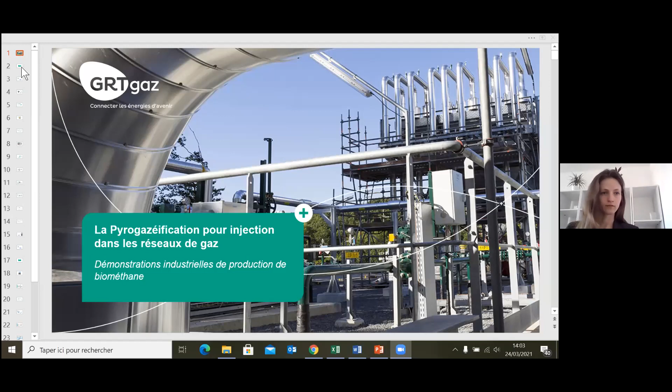So first of all, the context and the challenges of the pyrogasification sector for injection into gas networks. Good afternoon, Bertrand Simon.

Now, GRTgaz is a gas transporter, let's say, in France. We're in charge of moving gas across 80% of France. Our main role is to take the gas that arrives in a gaseous or liquid format through the terminals, and then afterwards we transport the gas to all of our major industrial clients or to the main centres

where the gas is consumed, in other words, the major towns and cities. We run a network, a gas transport network of about 33,000 kilometres.

So this means that we cover as many kilometres as the railways do in France, just to give you an idea of how big our network is. And we transport over 500 terawatt hours of gas per year, which is greater than the amount of electricity consumed in France each year.

So, as you can see, a great deal of energy travels through France, and three quarters are used up in France, and about 20% of the energy then goes into neighboring countries.

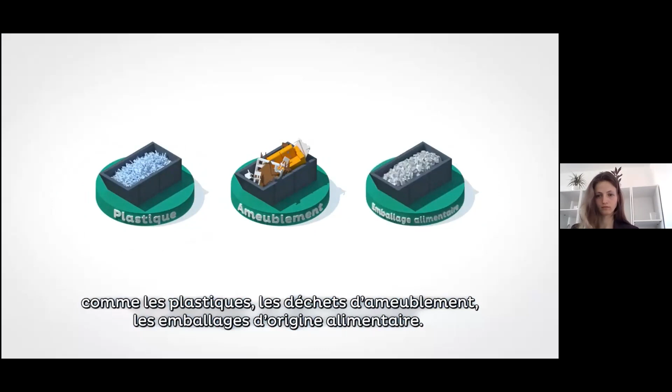Thanks to pyrogasification, for example, we at GRTgaz believe that it is possible to optimise this waste that is produced locally and that has been very rarely used thanks to the traditional approaches, whether it's of renewable origin or not, such as residue from farming, for example, from the wine sector or from industrial sectors, or whether it's of non-renewable origin, such as plastics, furnishing waste, or packaging for foodstuffs. Well, all of this waste can potentially be used to produce green gas.

Pyrogasification consists of basically heating materials that contain a great deal of carbon at a temperature between 850 and 1500 degrees centigrade. This operation aims mainly to decompose the raw material into different gaseous molecules. This mixture of molecules that we call syngas is mainly comprised of all different types of carbons. Methane is one of them, for example, and the molecules obtained are then recombined to produce a different type of gas. Once this gas is injected into the networks, it can be then used locally, and it can replace the natural gas that has up until now been provided.

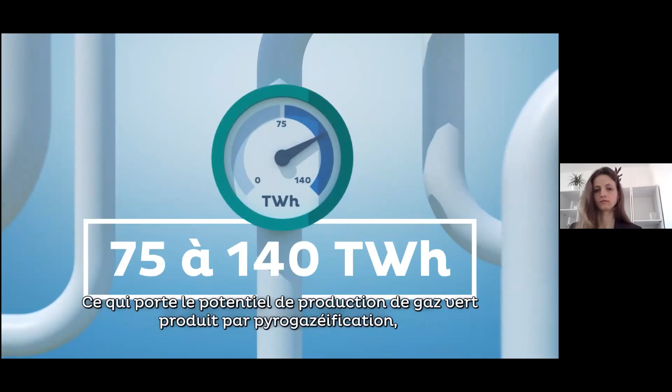Local areas can potentially reduce by 50% the amount of waste that is then sent to tips, and 100% of the plastic recovered should be able to be recycled. This means that, potentially speaking, green gas production using injectable pyrogasification solutions would mean we can move from 75 to 140 terawatt hours. This accounts for approximately 1/3 of the gas present in the networks.

By interconnecting the energies of the future, the transport network for GRTgaz will be the link between the resources available in the local areas that are as yet not used and the energies of tomorrow.

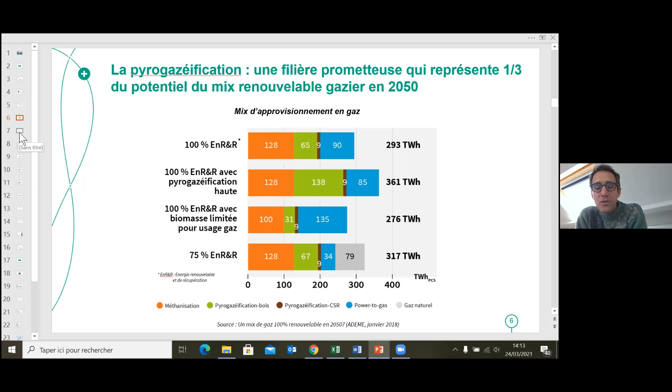A study that was also carried out back in 2018, one that was coordinated by the ADEME, demonstrates that in 2050, 1/3 of the gas that will be consumed in France will be produced thanks to pyrogasification. In other words, there's enough potential in our local territories for us to be able to guarantee that we can produce the gas that we need for our own consumption.

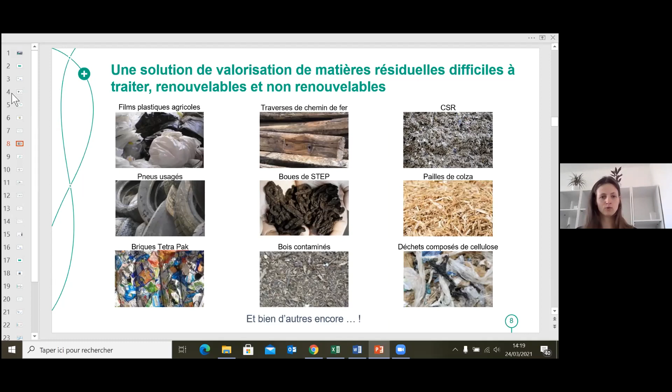So as we were saying, pyrogasification is first of all a solution for reusing residual matter that cannot be recycled or reused. We're talking about a broad range of resources. We've identified 22 main categories that can be renewable materials, but also other types of materials: forest waste, wood that's a little more polluted, for example wood polluted with solvents, but also non-renewable waste such as old tires, plastic waste, or solid recovered fuel. These are things rejected from sorting units or that come from household waste. These are the main categories that can be used in pyrogasification systems to produce gas that can be re-injected into the network.

But what we have to underline is that not only are we seeing new projects emerging, there are also projects achieving their objectives, producing gas for re-injection. For example, GoBiGas, which started injecting gas into the network in 2014. So there are different successful projects in Europe, and this means we have a solid base for commercial projects at European level, and in particular in France.

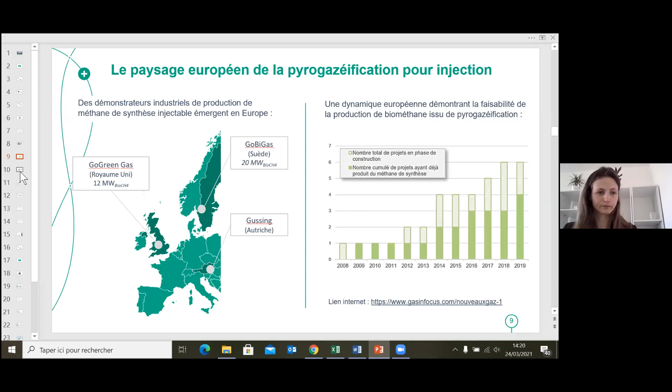Yes, so talking about France, there's a great movement in France. Lots of things emerging, about 10 or so projects.

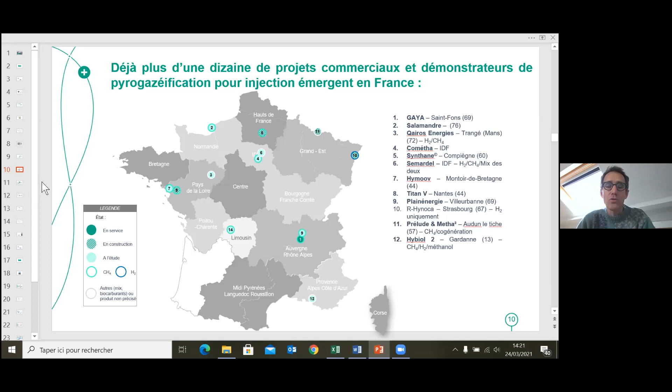Pyrogasification for injections. And to those, there are a number of private projects that need to be added, so we don't have the details of those on this map. All of these projects are part of a local circular economy. The aim is really to make the most of the local waste produced in the local area, and that's why most of them are supported by the local authorities, because they do provide a service. They treat the waste, but they also produce energy locally.

Now let's focus on, among the projects, 4 projects because GRTgaz is investing in these projects, it's supporting these projects. These are demonstrator projects, all 4 of them. The aim behind the projects is to produce methane using a pyrogasification value chain or a methanation chain to produce different types of gas.

So there's the ITIA project. It's a demonstrator, the Synthane. The idea is to use pyrolysis that's very well controlled by ITIA with a catalytic methanation process. There, the objective is to produce synthesized methane.

So there's also one in the west, in Nantes. The aim there is to couple a new kind of technology, a gasifier that is produced and controlled by Leroux et Lotz. And there's also a methanation unit, a biological methanation unit. This is innovative for Europe, and there will be a great future for this kind of process.

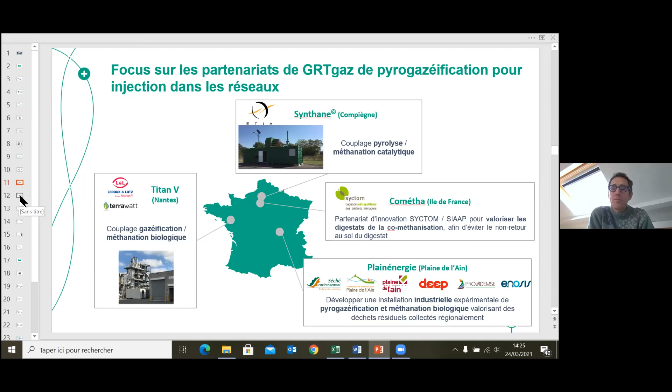La pyrogasification. So pyrogasification for injection, as we see, we've got demonstrator projects, we've got commercial projects across France. It's a sector that is structured and very much mobilized. So there are over 50 stakeholders within the injection pyrogasification working group that's been working now for 5 years.

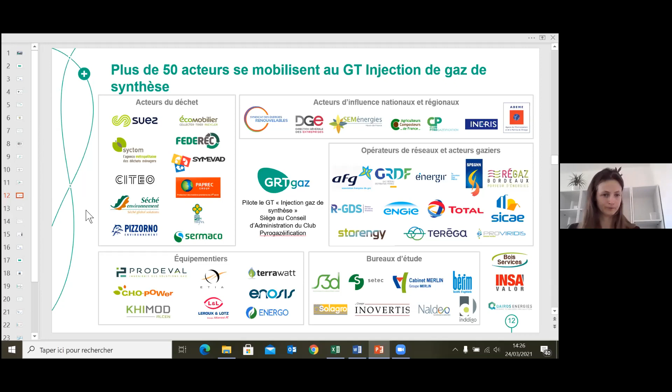The working group belongs to ATEE, so that's an organization working on energy and the environment. So it works with different stakeholders. Within the working group, there are all of the different value stream stakeholders based on pyrogasification, waste stakeholders, and network operators and gas stakeholders, as well as OEMs, French OEMs, design offices, but also key opinion leaders at regional and national level.

So this sector, as far as we see, has different assets, and that's why GRT Gas and the industry generally are interested in it. Well, first of all, what are the advantages? Well, it's the use of the waste that we've just seen. But what is noteworthy is that often it's waste that we don't know what to do with. So often it's waste that is usually buried in landfills. So pyrogasification allows us to stop burying this waste and transform it into a resource.

It also means that we can use a lot of different types of residual matter. So we mustn't get this wrong. Pyrogasification is not a penknife that can adapt to everything. It has to be sized according to the type of waste that it has to treat. But in the world of pyrogasification, there's a variety of technologies, and that means that we can work with different types of matter. So there are also economic challenges that can be taken into account.

So it's a sector that allows us to create units with local jobs, because the stakes are local, the challenges are local, and these jobs require different levels of qualification. And that's to be appreciated, given public policies in different regions. In France, we're talking about units that are really sized for the area in which they are installed. The idea is not to create huge plants, but to deal with the waste that is produced locally. So the idea is not to have these plants in the center of cities, but really to have them around the periphery.

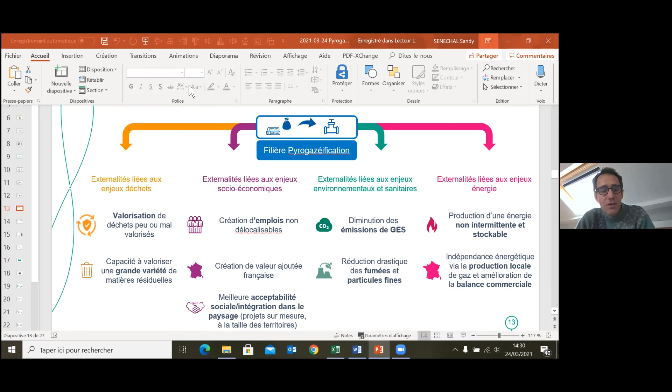So these are the different advantages that we see in pyrogasification for injection, and we believe that it's a sector that has a lovely future in France.

Okay, so some key figures. Pyrogasification for injection is promising. This sector in 2030 will represent 1 terawatt-hour of gas injected into the network. This corresponds to 500,000 tons of waste a year. And from an environmental point of view, we'll be able to reduce our CO2 emissions by 165,000 tons per year.

So it's ready to be industrialized. As of 2023, we will be able to industrialize this sector. There will be pyrogasification for injection plants ready. The projects will be sized according to the regions. The average power in France is between 2 and 30 megawatt CH4s. This corresponds, for those familiar with incoming tonnage, to 5,000 to 100,000 tons coming in a year. So this means that local reservoirs, local sources of waste will be optimized.

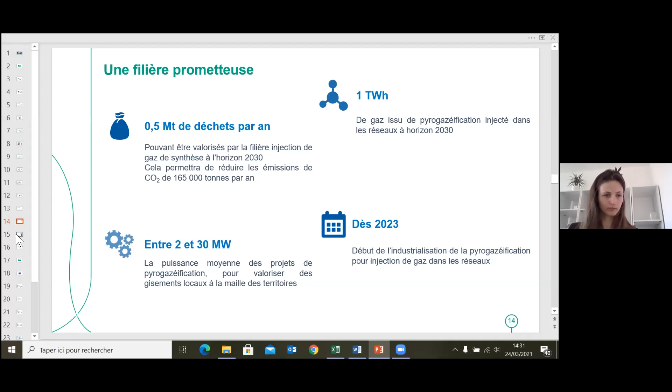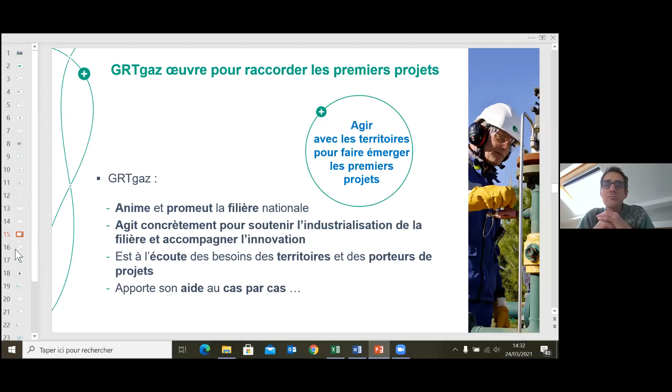So concretely, GRT Gaz, with this very strong conviction, is supporting the sector. It's feeding into national thinking, regional thinking, helping to federate stakeholders. We're also supporting local projects and providing help with innovation. Innovation, of course, is necessary to make this technology even more efficient. So we're really there to listen to what regions have to say, or what project leaders have to say, and to help this kind of system emerge even further.

So to conclude, in a few words, pyrogasification for injection into networks is a solution for really optimizing waste and producing gas locally that can then be injected into the networks. It's a dynamic sector in France. This can be seen by the deployment of different stakeholders in the sector, but also by the emergence of commercial projects and demonstrators across France. So I suggest now that we close this first part of the conference with some questions and answers.

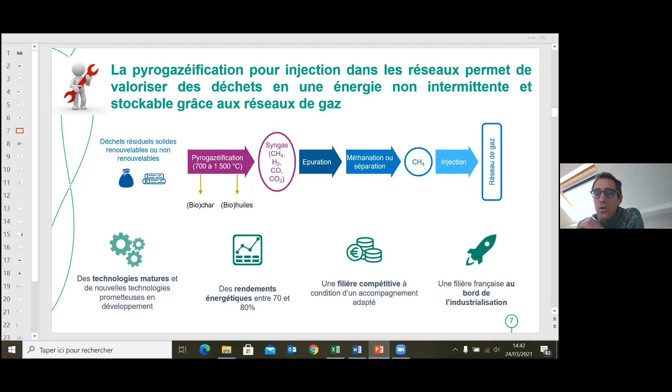Perhaps we should answer the remaining questions in writing.

Just perhaps one last question, which has come up again: it's about the different business models possible. It's true that there are two main business models that can be envisaged. Of course, these need to be worked on a case-by-case basis, and it really depends on the technology being used.

There's a business model that focuses on renewable waste, so biomethane that's produced. There's a framework in France, the energy climate law. This makes it possible to have experimental contracts set up with calls for projects, and the modalities for these projects are to be thought about with the local authorities, with the support of innovative sectors working in the pyrogasification field.

And there's another business model that focuses on non-renewable waste. There's a kind of fee that acts as a driver. Some companies did not know what to do with their waste, and so this was a means of making the most of it.

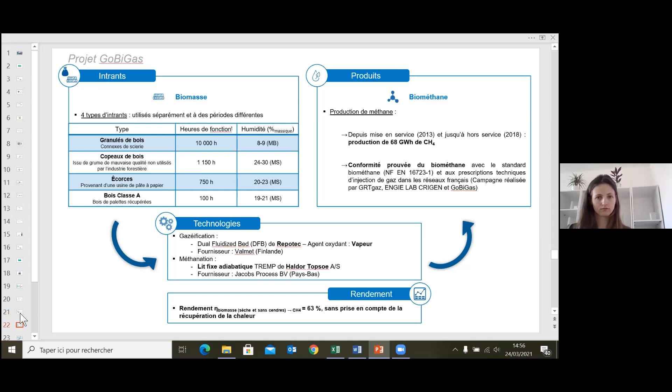You've got the technical diagram on the right-hand side, but on the left-hand side, I'd simply like to say that it's a standard pyrogasification project for injecting gas into the network. There are 4 main stages: first the gasification stage, then the purification of the syngas. Syngas is cleaned in order to methanate it afterwards. The aim, of course, is to make sure that we're not deactivating the catalyzer of the methanator. Then afterwards, we make sure that it's compliant with the specs.

Let's now go back to the issues related to energy specifically. To go into more detail on the production process for gas used within the scope of the GoBiGas project, we introduce the fuel, the biomass, the raw material, into a fluidized bed, and then it is gasified with steam. We decompose the different molecules of the biomass so that we're able to produce a syngas made of CH4, CO, CO2, and H2.

Then after that, the non-convertible part of the fuel, which we call the char, as Marion explained earlier, is conveyed towards a combustion zone. In the combustion zone, the char is burned in order to produce the heat necessary for the gasification process. That's why earlier I talked about the dual fluidized bed, because you've got the gasification part and then another fluidized bed for the combustion part, and this is what generates the heat necessary for the process.

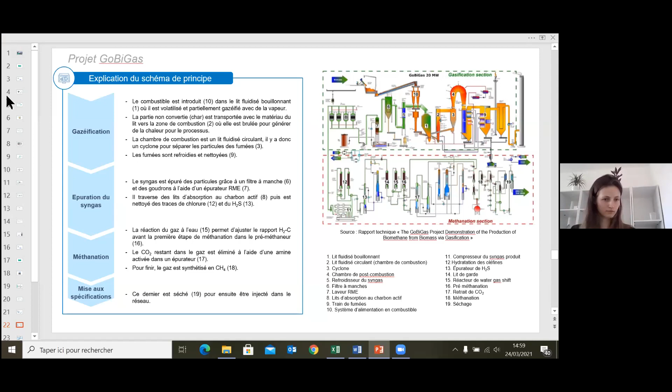As said earlier, the methane we produce—we've been able to prove that it is compliant. We've felt reassured thanks to the campaign carried out by NG Lab, GRT Gaz, Cregen and GoBiGas, so we are in line with European standards and know we can inject this gas into the network. The GoBiGas project has also made it possible to provide a great deal of data about the composition of syngas made using different inputs, the ones I described. There are quite a few questions on this in the chat, so you've got the information relating to those questions in this table.

And concerning the environmental performance, I've seen questions on this. Well, in the GoBiGas project, as I said, we used the different types of wood, and this enabled us to reduce by 80 to 85% the greenhouse gas emissions. Hence, it means that we comply with the standards that have been set out at a European level by the European Directive for Renewable Energies. So at the time it was the RED directive, but now we have the new versions, RED 2, that are currently being translated into French law and into European law.

There's another question. Why did you not continue to run the demonstrator in order to be able to optimize the process and the system? Answer: well, it's true that I didn't really go into detail on that because it was all a bit technical. Let me try and find the right page.

I'm not quite sure what the technical level is of all of the different participants. Let's just say that numerous optimization phases were entered into nevertheless. So I could talk in detail about them in terms of the process if you're interested. We do have quite a lot of feedback, whether it's a question of reducing as much as possible the amount of pollutants, also reducing the dwell time in the gasifier, optimizing the purification process.

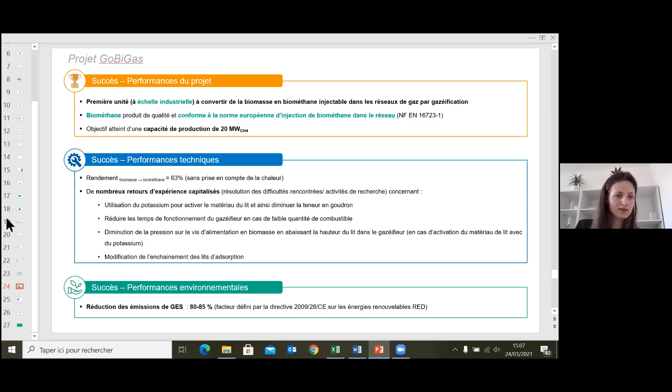There are all kinds of ways in which we attempted to optimize the process, but it is true that the demonstrator reached its targets within the scope of the project. The basic aim of the demonstrator was simply to illustrate that we could produce a good quality product, technically speaking, that the biomethane that we could produce using biomass would be sufficiently efficient to inject into the network. So we achieved the targets. We achieved the 63% yield that we were looking to achieve and that we've already talked about.

The demonstrator project in its initial phase wasn't designed to be profitable, and the demonstration of the economic profitability formed the subject of the second phase. And as we saw, the decision was made not to launch this second phase, basically because we didn't have a sufficiently appropriate support network at the time, or support solution to provide us with the funding for this.

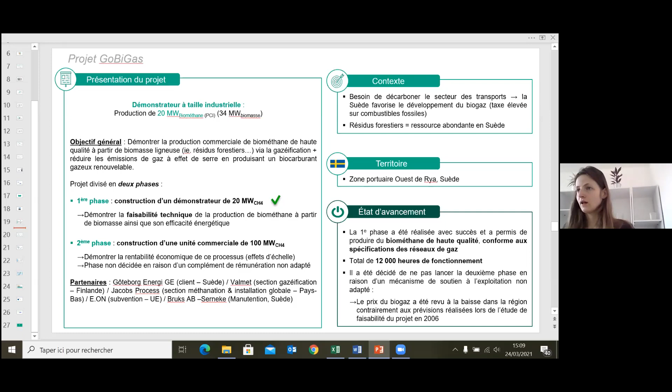Concerning the Capex, we're talking here about the demonstrator. Of course, it hasn't been optimized from an economic perspective. The Capex amounts to 125 million euros for this project. For the production costs, the production costs are mentioned in euros per megawatt hour of gas produced. So if it was the price of the input, it would have been very, very expensive.

I can see that time is marching on. So I suggest that maybe we could move on to the next presentation.

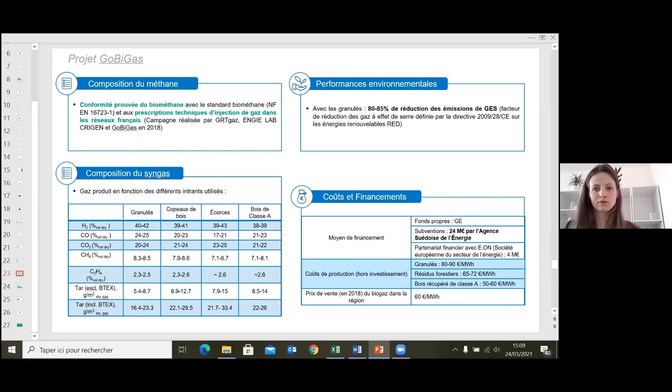We've just seen a European project whereby we've seen the example of biomethane being injected into the network. We've also got another example, a great example in France. And Marion, let me pass the floor over to you so that you can now present the GAYA project.

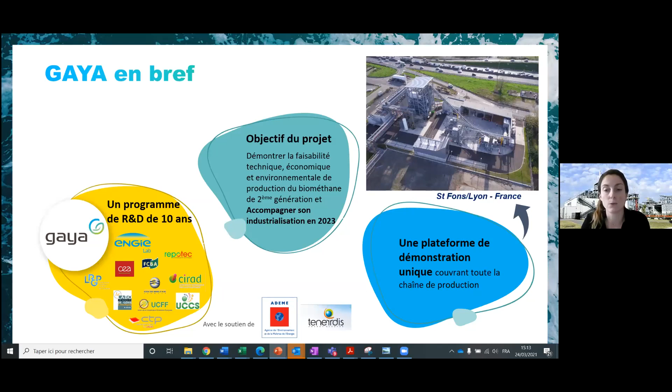One of the major challenges of this project was to demonstrate the feasibility at a semi-industrial scale. So in the photo in the top right hand corner, you can see the GAYA platform. This was built in Saint-Fons, just above Lyon, by ENGIE, and it is now operated and run by a department within ENGIE.

The GAYA platform is a unique platform, unique in Europe, even in the world. It's the only platform that is at a semi-industrial scale, that is up and running, and that covers the whole range from the input, from the biomass to the waste, through to the actual production of biomethane or synthesized methane.

It is unique partly because it's an R&D platform. In other words, it's equipped with lots and lots of sensors, lots of wherewithal to perform analyses throughout the whole production chain. The basic target is to monitor absolutely everything that could potentially happen, the aim being to optimize its

performance. Also, the site is a semi-industrial site because of its size, but also because we've made the conscious decision to build it and to run it in exactly the same way as we could run an industrial site. The result is that it's highly automated with a complete control room. Here, for example, in the top right-hand corner, you can see the operators in the control room. And from the tertiary building here, they're able to control all of the process area that is located here.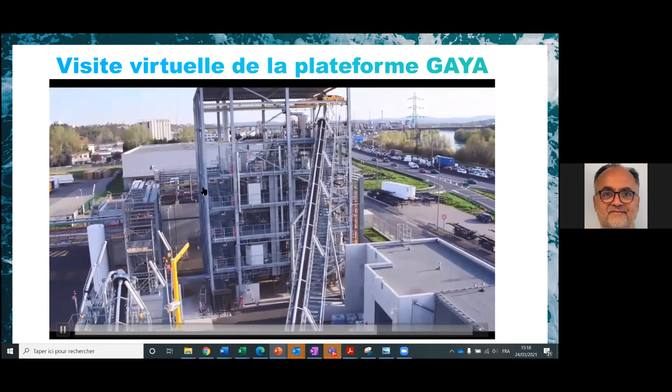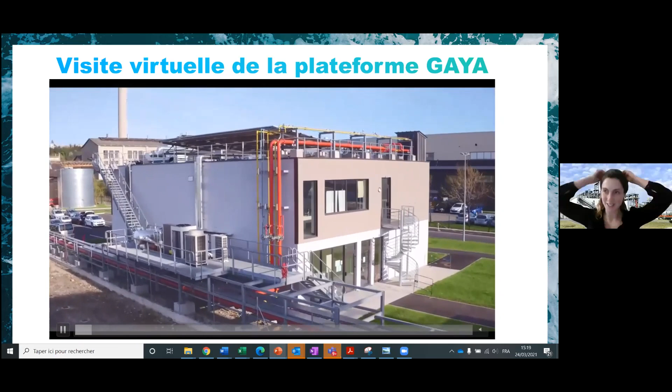Ah, voilà. The music has been stopped. You need to start again because the music covered everything that was being said. Okay, I'll start again. Thank you, Marion. So I'll try and speed up a little bit.

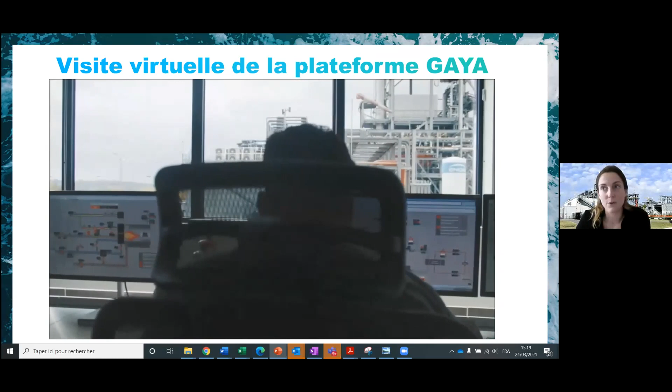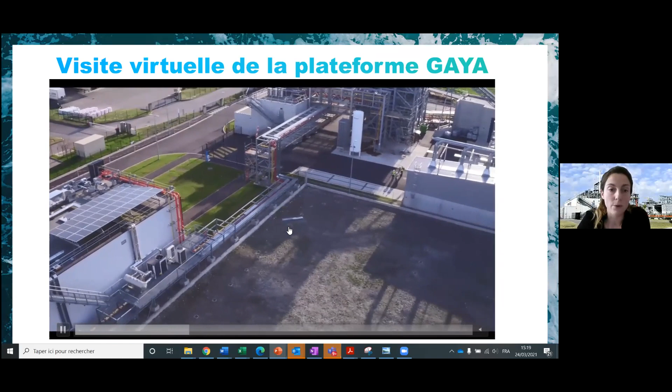So you've seen the pictures. So this is the lab, the analysis lab. You can see the equipment in the lab. So then here we arrive in the control room. So you can see the operators who are controlling, changing operating parameters remotely on equipment that is located in the technology area. This is the tertiary building that leads to the technology area.

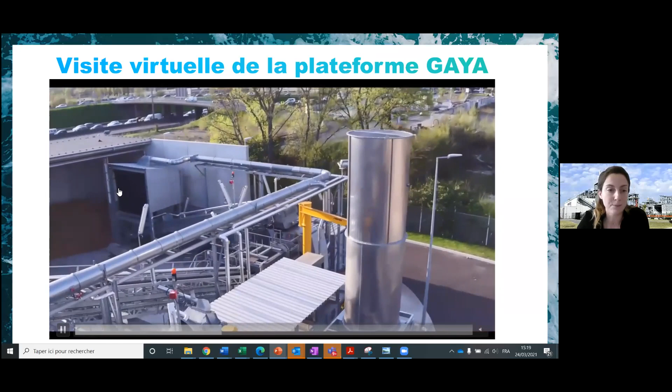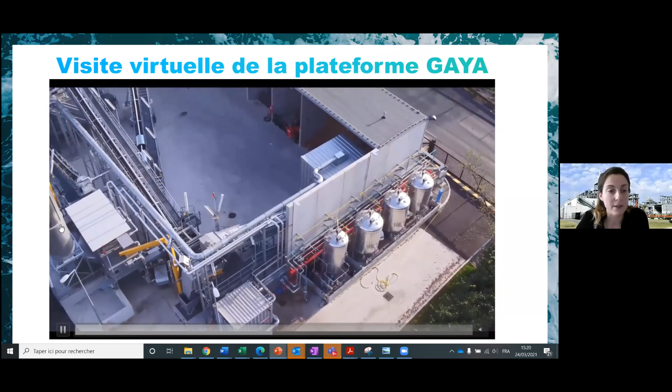So you've got trucks that come in here, they unload the biomass and the waste. Then here in this part, you've got storage cubicles for the input, whether we're talking about biomass or waste. Here you've got the pre-treatment preparation part of the process, removal of iron, screening, drying. And what we can't see very well over here, there are 3 hoppers for dosing and mixing up to 3 different types of inputs. And this big conveyor here takes the inputs up to the gasification stage.

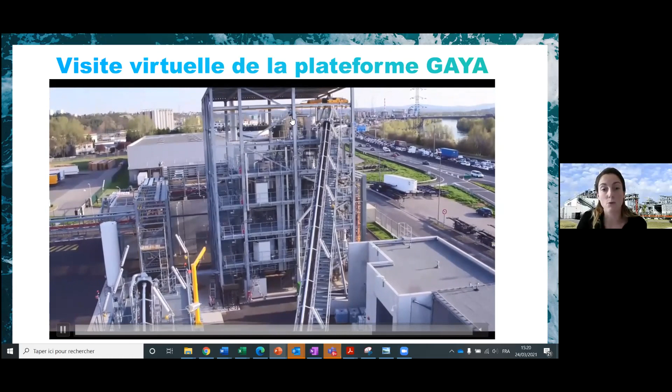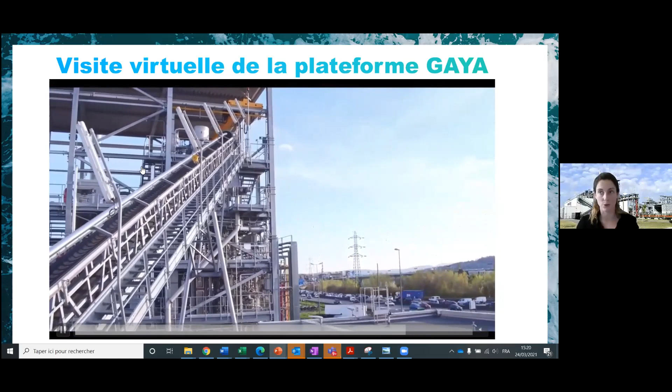And in this part, you've got the thermochemical conversion skid. So you've got the gasification here, you've got the purification of the syngas part here. That's all part of the skid. We can't really see it very well. And here we've got the methanation part of the process. So there we go.

So just to summarize the results obtained up until now, the GAYA project is in fact a project that had 4 main objectives: to test technologies available on the market, so the gasifier, for example, and any similar gasifiers used for Gobigas, which was presented by Sandy just beforehand, and also to look into other innovative technologies patented by ENGIE.

If I draw a parallel with Gobigas, we changed the methanation brick an awful lot. I don't know if you remember the diagram shown by Sandy, but on that diagram we could see a large part occupied by methanation, with 4 to 5 reactors altogether for the water gas shift and 3 methanation reactors. But for GAYA, we've just got 1 reactor that does everything, and this means we can save a lot in terms of space.

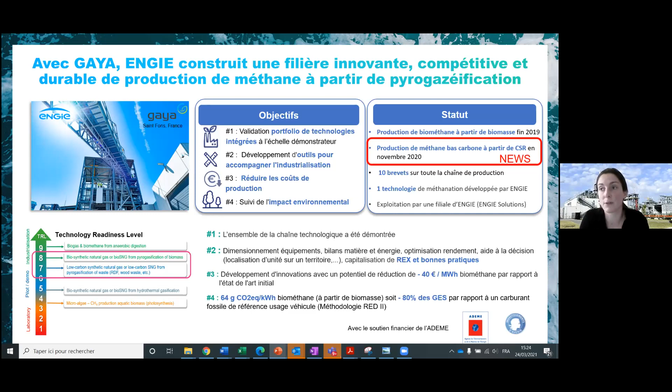So in terms of major results for the platform, we demonstrated that we were able to produce biomethane using biomass. Our first cubic meters of biomethane were produced at the end of 2019, and we made a major step forward recently. A year later, we were able to show that the process worked and was integrated by ENGIE, and that we were able to treat solid recovered fuel. In November last year, we made our first cubic meters.

So this is just to say the same thing, basically. With these tests that were carried out, we managed in a very little time to move from the biomass and the solid recovered fuel. We showed that the synthesized gas was robust, and it was able to go through to methanation. We also measured different components in the syngas, in the fumes, in the synthesized methane, to look at trace materials, organic components, sulfur, ammonia, etc.

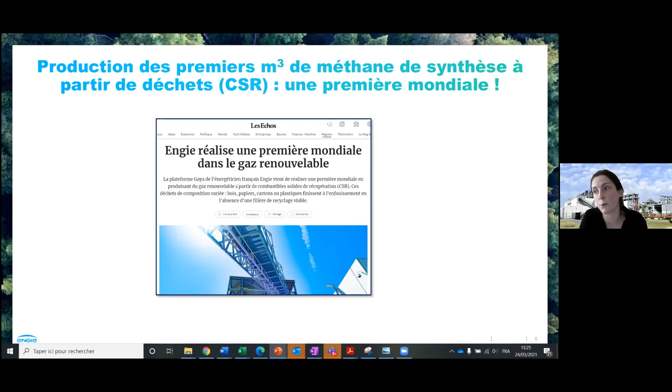But also in the fumes, NOx, SOx, HCTs, COVs, and other components. So we were able to look into all of these things, and we were able to analyze the solid residue of the process.

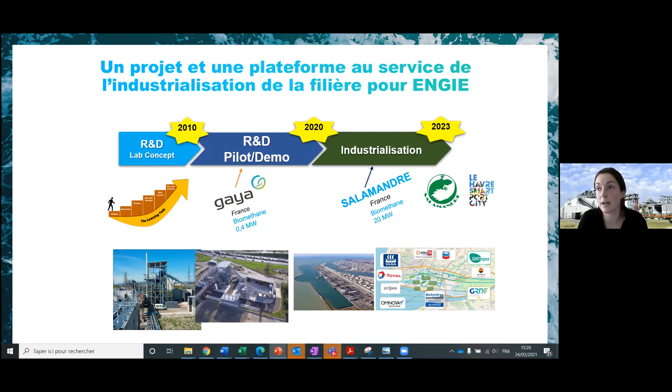So from the point of view of industrialization, the GAYA project made it possible for ENGIE to move on to industrialization. So currently, that's what we're doing. We're industrializing. The first commercial unit, which will start to be built in 2023, will be based on the GAYA process, and we're planning to start operations in 2026. The commercial demonstrator will be located in Le Havre in the port area, and it will have a size of 20 megawatts, similar to what Sandy and Bertrand were referring to. It will be fueled by wood waste or solid recovered fuel.

Now to finish, the GAYA platform up until now has been dedicated to the conversion of biomass, the idea being to produce synthesized biomethane. Very recently, we've developed the platform further so that we can use waste, and we're going to continue to broaden the type of waste that can be treated by this kind of process. The objective, of course, is to be able to work with very low cost waste, as negative a cost as possible, in order to have something that's very profitable. So we want the platform to be dedicated to the production of renewable gas by pyrogasification.

So we want to be able to produce hydrogen, because according to the first research work carried out over the past few years in the lab, without making too many adaptations, we can produce hydrogen using a similar kind of system.

So in the future, well, in fact we're doing a lot of brainstorming at the moment, and we're setting up consortiums for new R&D projects focused on the platform. So if you're interested in contacting us, being part of this, contact us by mail.

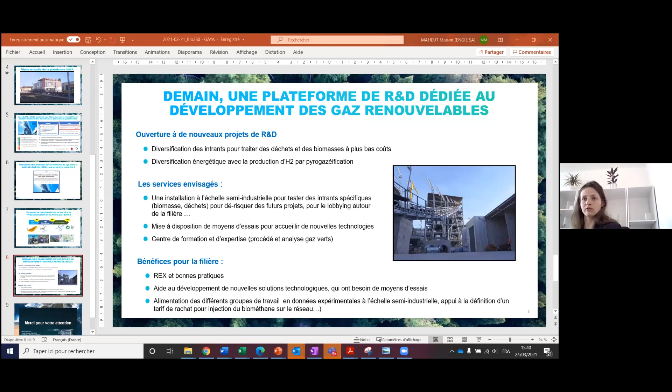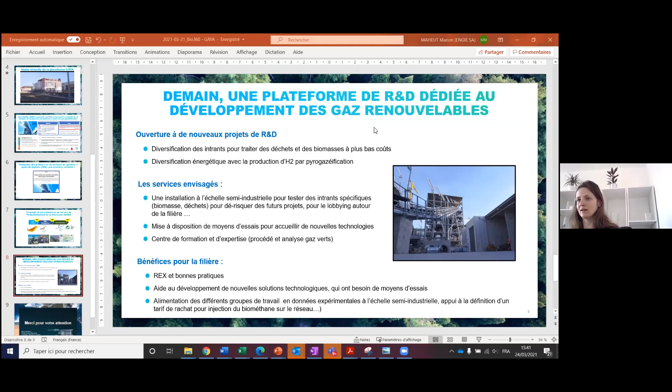So pyrogasification for injection makes it possible to really optimize waste, what happens to waste. We can produce a gas locally that can be then injected into the network. It's a dynamic sector with several commercial projects and demonstrators that are seeing the light of day in France. And we've also seen the technical feasibility for the production of gas. This is what we've just seen with Marion's presentation, producing biomethane based on solid recovered fuel or biomass.